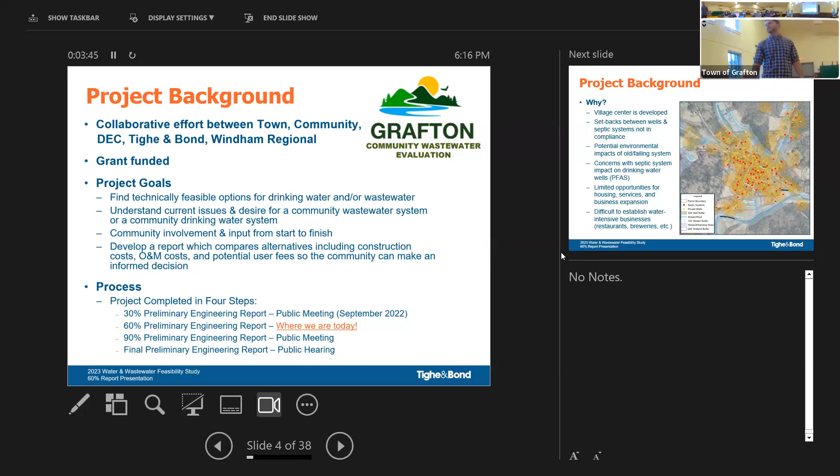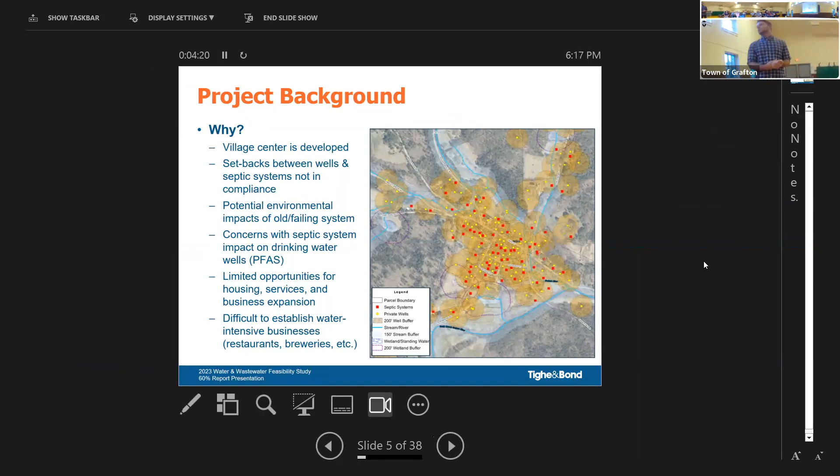So why would Grafton want to go ahead and do one of these feasibility studies and look into potential water wastewater system? A few reasons. Number one, the village center is developed. We're right here in the village. There's relatively small parcels that are pretty close together. And what happens there is you got drinking water wells relatively close to leach fields. And that can become problematic, especially if they're not maintained, or old systems that have failed. And there's also some concerns that Aaron just mentioned with PFAS around the school as well.

We've also seen with other communities that without a public drinking water wastewater system, sometimes that limits opportunities for certain types of housing, businesses expanding. For example, if you want to add a bedroom on top of a storefront, something like that. Sometimes you can be limited by the size of your parcel and septic system. It's also difficult to establish water-intensive businesses like restaurants and breweries. The lack of a public sewer system can be limiting there as well.

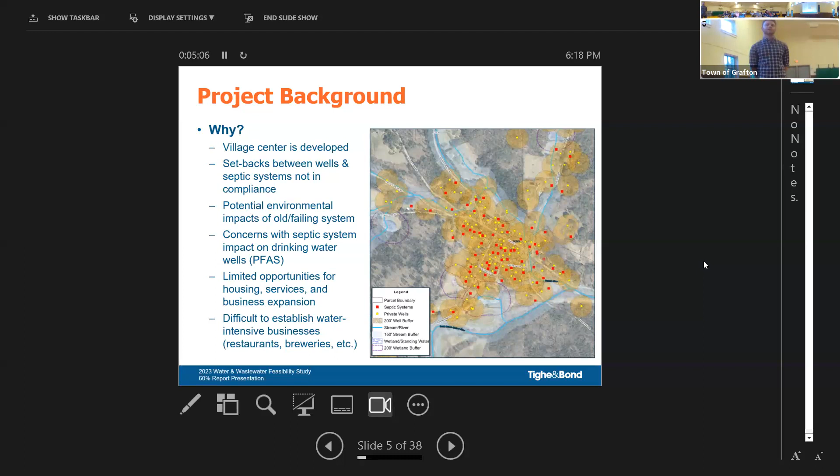So then why now? One of the big things is fundability. So right now we're kind of in a unique point where there's some historic amounts of funding out there, probably more than there's been since the 70s, during the Clean Water Act. And as an example, Grafton was appropriated about $4 million already for a village wastewater system through ARPA.

And like I said, there's some current concerns with water quality, mainly surrounding PFAS. And just want to make the point too that Grafton's not the only village or town considering this. All those red dots on that map there are other small communities who have no water or sewer system.

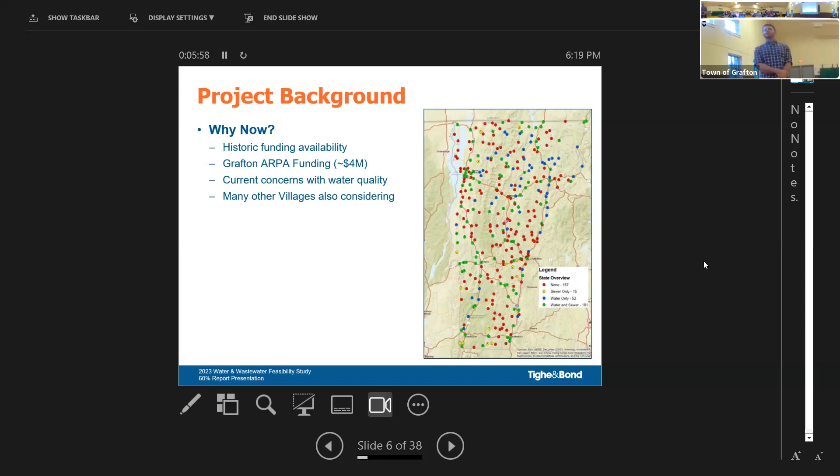So going back about a year, it's like the end of September last year, we had the 30% meeting. During that meeting, we talked about a service area. So service area is which parcels would be included in the system and be served by a public system. We came up with a flow estimate for that service area. And then we spent a lot of time talking about two sites mostly for a wastewater system.

If you recall, for those of you who were there, one was the Village Park site, and the other was the Alpine Field site, which is the field back behind the cheese factory up on the hill. We got a lot of good feedback from that 30% meeting, and the general takeaway there was that Alpine Field was generally preferred due to its size and isolation from the village. So it looked pretty promising on paper. I'll talk about some site tests we did there in a minute. And then that last part we talked about during the 30% meeting a year ago was considering a drinking water system.

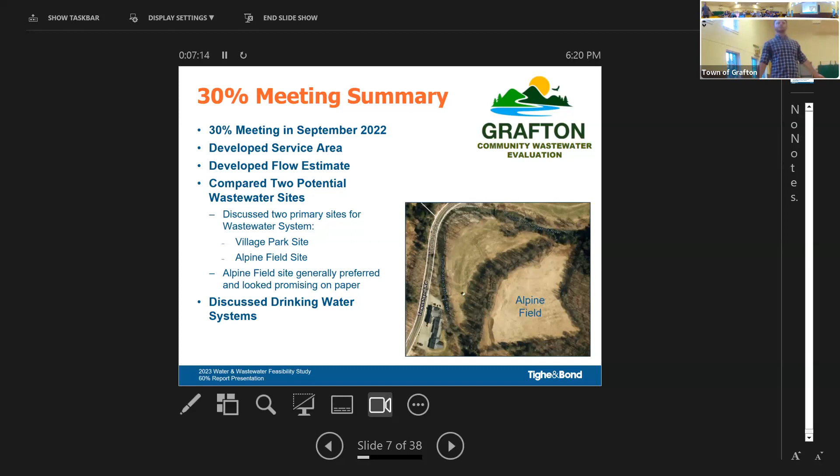So speaking of drinking water systems, as Aaron said, we've been working closely with the DEC over the last essentially year. And the drinking water system is a little bit complicated situation. So in our original scope, we had to investigate a community drinking water system. That was in our scope because it was a hot topic in the town at that time and a concern because of the PFAS.

So Aaron touched on this a little bit, but just for those of you who don't know, PFAS is essentially a man-made chemical that has been used in all sorts of consumer products for many, many years, I think back to the 40s. And it's been found in a few wells around the school. And one thing to note is that PFAS persists in the environment for a long time. It's important to remember here in a second when I talk about how it relates to a wastewater system.

So some specific considerations for Grafton related to a drinking water system. We could consider just a standalone public drinking water supply system and no wastewater system. So that's an option that we wanted to look into. And then we started looking into the Village Park site and what it would take if it was feasible to use that site for a wastewater system.

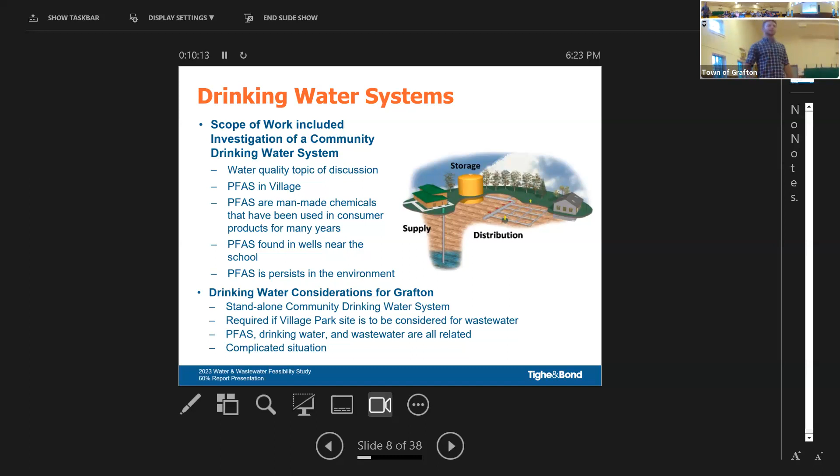So one of the things that became clear in discussions with the DEC when talking about a drinking water supply system is that the town, in order to permit a new community drinking water system, would need to demonstrate what's called technical, managerial, and financial capacity. We use TMF for short. Essentially what that means is that the town needs to have enough personnel and proper finance to successfully operate and maintain the drinking water system.

So that would be a challenge for Grafton, and Grafton's not alone in that. Any small village or community struggles with that as compared to a city, for example, where they've got a lot more resources. So that's one major challenge that we've run into here with the drinking water system.

So, path forward. The DEC has determined that a separate drinking water system preliminary engineering report would be the right next step to consider a public drinking water system, which would also need to be considered if we wanted to consider the Village Park site. And that drinking water PER would be fundable through a grant through ARPA. It's essentially the PER that we're doing now, but the one we're doing now has been a little bit more specific to wastewater. So we'd essentially redo this project with a specific look at multiple options for drinking water.

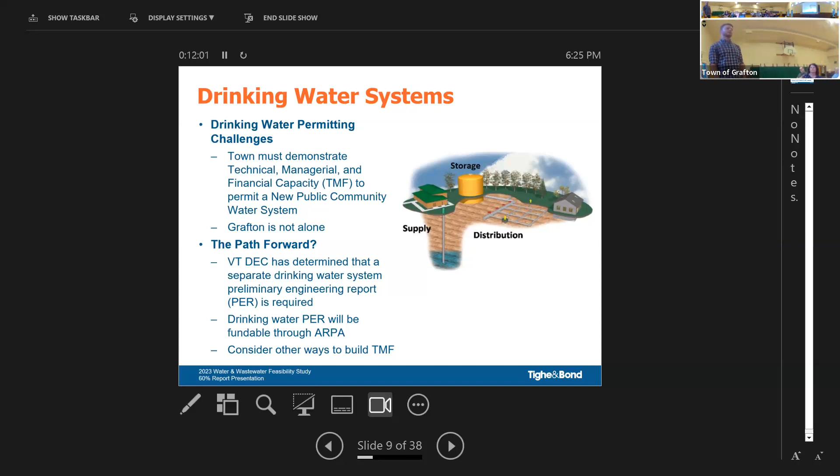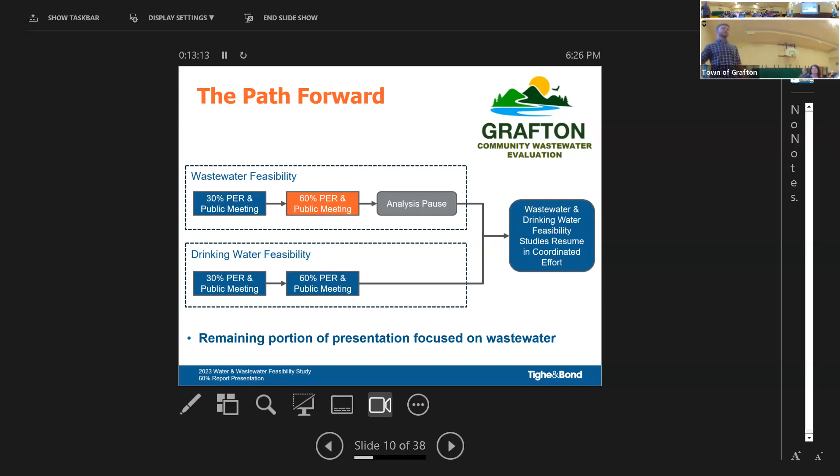So, that's a lot. There's probably a lot of questions on that. I think what we'll do now is I just want to focus on the wastewater system for the rest of the report, the feasible alternative that we have in there right now, specific to wastewater, and then we can get back to some questions on the drinking water.

So like I said, first step for wastewater is to determine a service area. So we did that. It was focused around the village center and what's called the village center planning buffer, which is about a quarter-mile radius around the village. So just some quick stats. In that service area, the area highlighted in black, there's 84 parcels total, about 56 residential, 23 commercial, 5 vacant. And then we came up with a flow estimate for that service area, about 42,500 gallons per day. And that included a 10% expansion for future growth within the district.

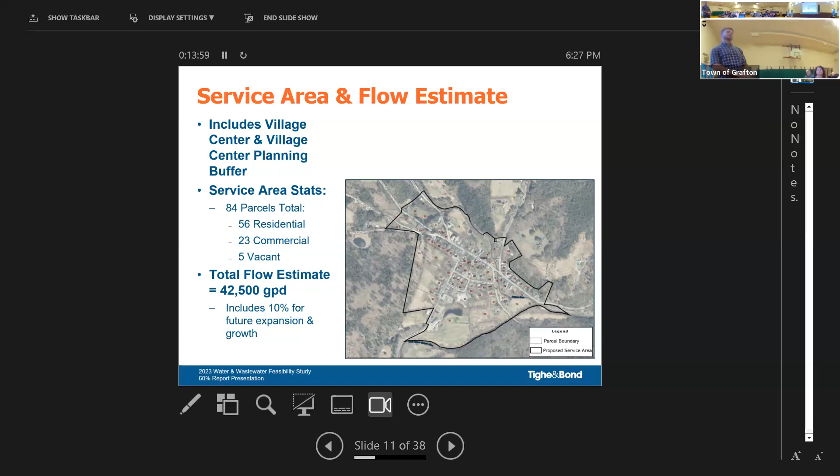So back to Alpine Fields. After we had that meeting back in September of last year, the town and ourselves went out to Alpine Field and did some test pits in November. Unfortunately, we didn't find exactly what we were looking for. We ended up finding signs of high seasonal groundwater, which becomes a challenge with installing a septic system there.

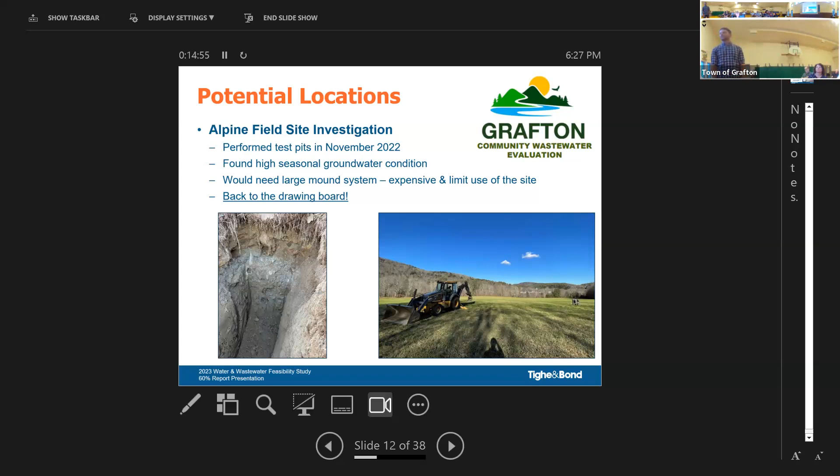Not that it couldn't be done, but what you'd have to do is essentially create a large mound system where you bring in some fill, which gets pretty expensive. But even more importantly, in this case, it would also limit Windham Foundation's use of that site, because they currently use that for spreading the whey from the cheese factory. So we had to go back to the drawing board a bit here for finding another site.

So what have we done since those test pits back in November? To be honest, it's been quite a challenge to find a good site here within a reasonable distance of the village. But we've been working with the town to really try to take a thorough pass of all areas that could be considered. One of the first things we did, it's called a cluster analysis.

Essentially, instead of trying to find one large site that would work for the whole village, we try to see if there's maybe 3 or 4 smaller areas that we could use. Unfortunately, that really didn't turn out too many good locations because of all the setback requirements from wells and the flood zone and things like that.

We also considered forested sites for what's called a spray field system. What we ran into there was that there's a lot of recreation in some of the forested areas around the village, so we didn't really find a great forested site. So then we said, okay, we really got to increase our radius that we're looking outside of the town.

And so we worked with the town, ended up identifying 14 sites, reached out to property owners. We talked to people familiar with those properties and kind of narrowed those 14 down to 2. One being the Spring Hill Farm site up on Houghtonville Road. The Upper Howland Mill site, Windham Foundation property, to the east of the village on 121. And again, we're still thinking about the Village Park. However, we can't use that site unless we have a drinking water system.

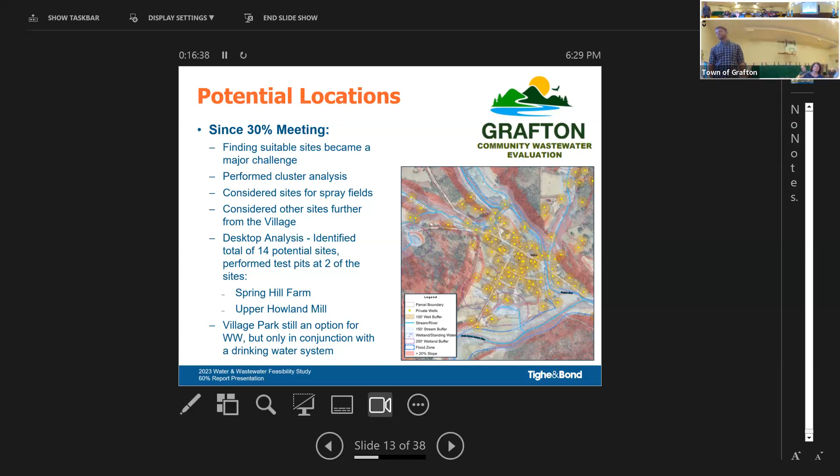So this is just a map showing some of the areas that we considered. Ultimately narrowed those down to those 3 shown in red. So just kind of a summary of what we found at each of those sites. Village Park site, decent soils below what we call a confining layer. However, like I said, there's a lot of challenges with that site.

The Upper Howland Mill site ran into high groundwater again, this time only 12 to 14 inches below grade, so not ideal. And based on those soils, again, it had to be a really large mound system, and ultimately there's just not enough area with acceptable slopes on that site, so that ended up being too small.

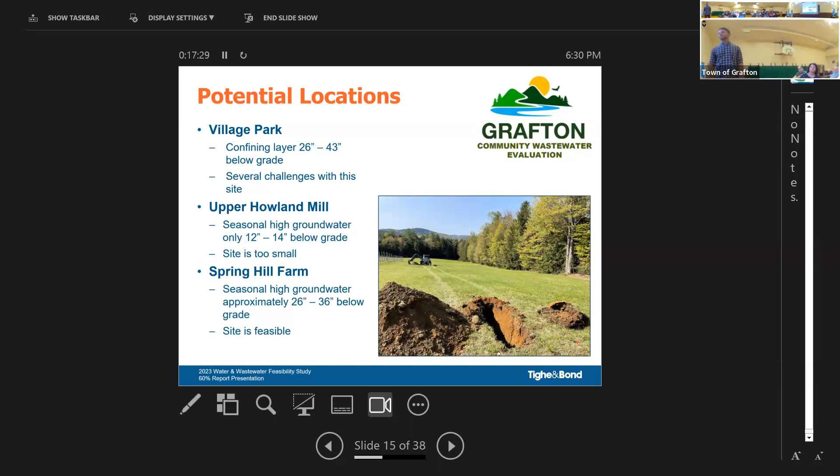The Spring Hill Farm site, however, we did run into some signs of seasonal high groundwater, but much better, a little deeper, which is a good thing. And that site's pretty large and would be feasible. So now we have a feasible site. We started looking at what type of wastewater systems could we go for.

We focused here on decentralized soil-based systems, so we're not talking about a conventional wastewater treatment plant with open tanks that are kind of notorious for being odorous. We're talking about a subsurface system that's mostly below grade.

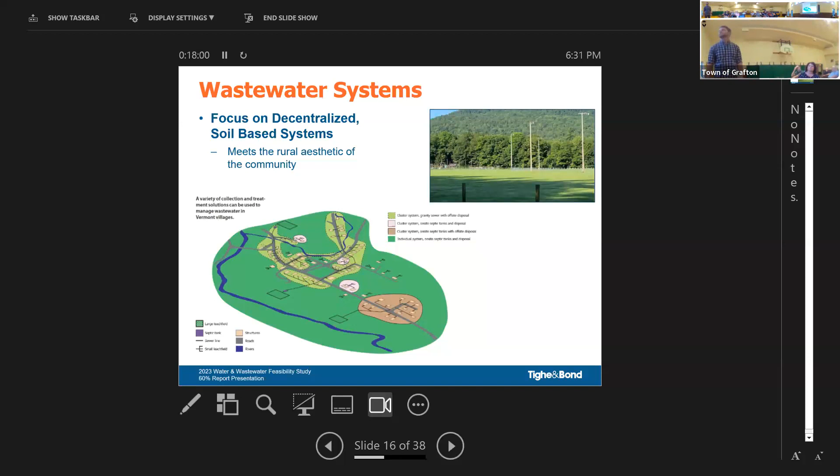So 3 components of a wastewater system: collection system, getting all the wastewater from the houses to a treatment system. And there's the treatment system. You also see us refer to it as a water resource recovery system. And then there's the return system. So after it's treated, back into the ground.

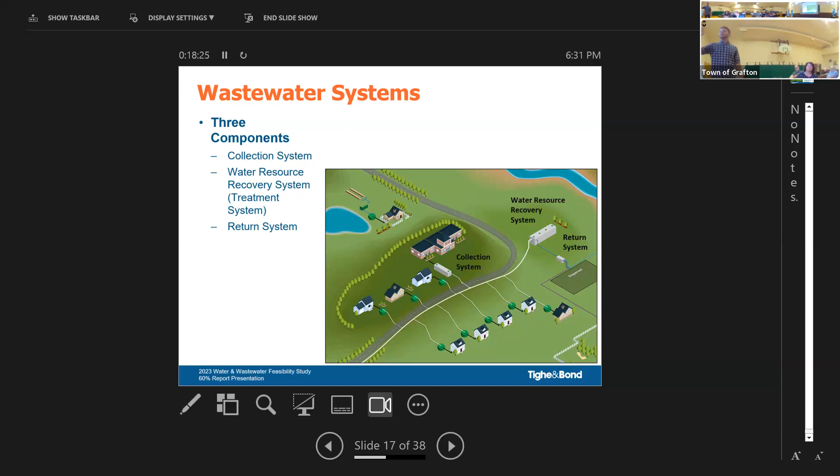So I'm just going to briefly talk about all the different technologies we looked at for each of those 3 components. So starting with the collection system, there's generally 2 types: conventional and septic tank effluent. Conventional is a lot of times used for some of those larger communities. Think about sewer systems and manholes in a city, where the solids and the wastewater are transported right from the house, right out of pipe, and right into the collection system, which is pretty big diameter piping.

And then there's septic tank effluent collection systems, a little different. This is a lot of times used for smaller communities like Grafton, and the concept here is you still would have a septic tank at each house, and there'd be what's called an effluent filter on that septic tank. So the solids all stay in the septic tank, and then just the liquid wastewater goes out to the treatment system.

There's a couple benefits there. Number one, because you're not transferring solids, you could use smaller diameter piping, and then you can install that piping with what's called horizontal directional drilling. So you don't have to do as much open excavation to install it.

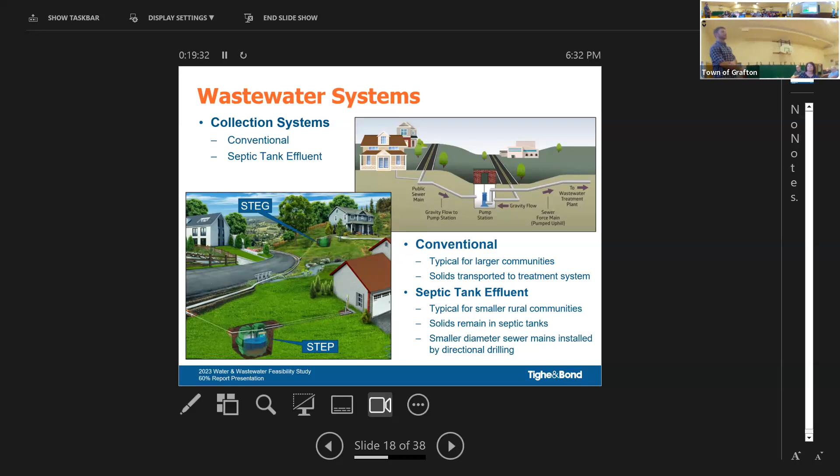Then we looked at 3 treatment systems. We were only considering technologies that are approved in the indirect discharge program. So the ones we looked at are recirculating sand filters, a media filter, and then a fixed bed bioreactor.

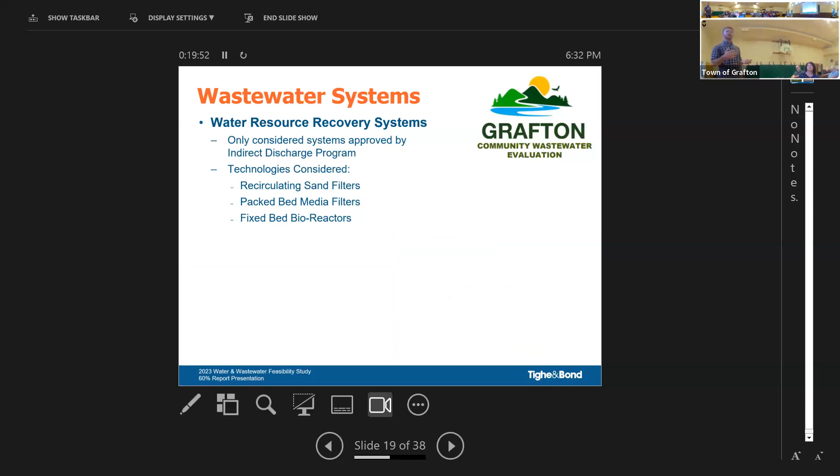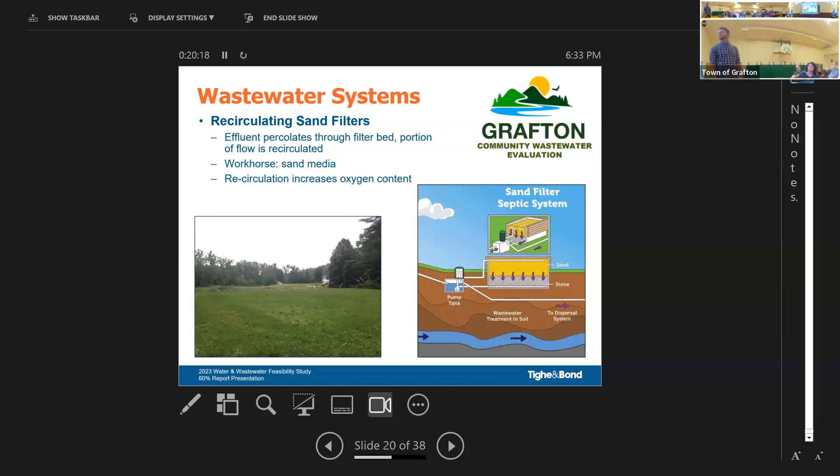So the first one, sand filter, really simple. The wastewater is distributed over a bed of sand, percolates through. That sand essentially treats the wastewater, comes out cleaner. A portion of that is recirculated, and then it goes to the return system. And I just mentioned too, those would be completely buried under a field.

The next one we looked at is a media filter. These are a little different, but very similar. They're all very similar treatment concepts. These, however, come in kind of prefabricated fiberglass tanks. Essentially, inside those tanks is a whole bunch of textile media. So the wastewater gets sprayed over the media, percolates through. There's some microorganisms on that media, which treats the wastewater.

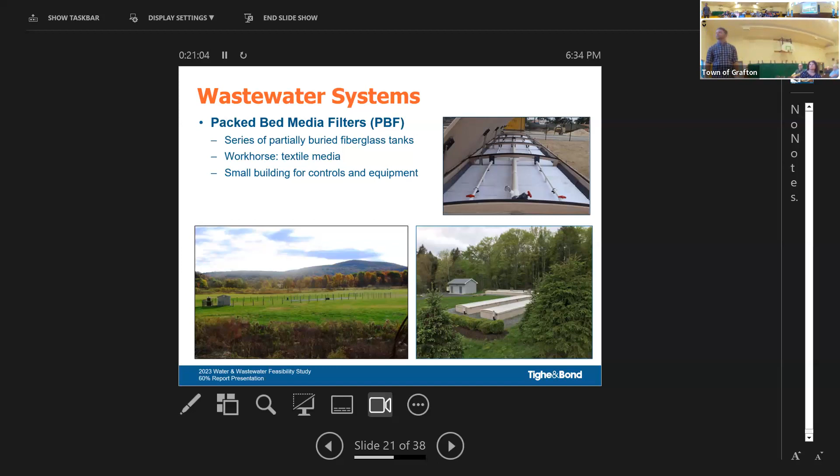Usually these, this picture down on the right is of a completed system. A lot of times those are installed a couple feet out of the ground just to provide access when there's snow. And then the final one, again, very similar, a little bit different style media. These ones are installed in a precast concrete tank. Some air is flowing.

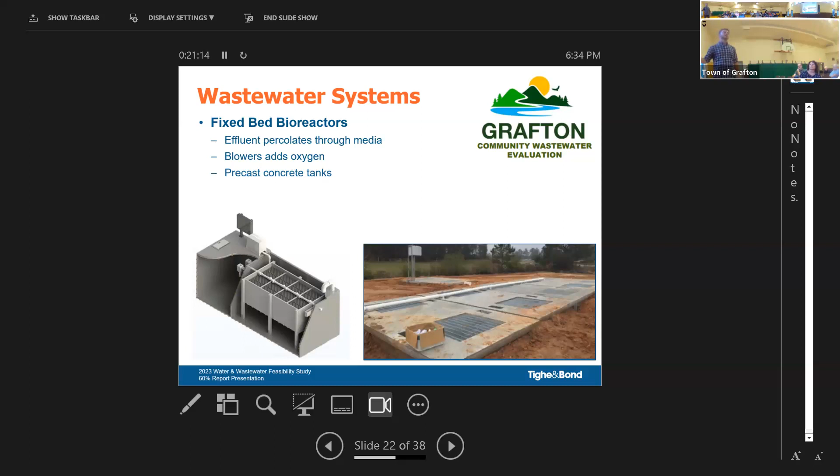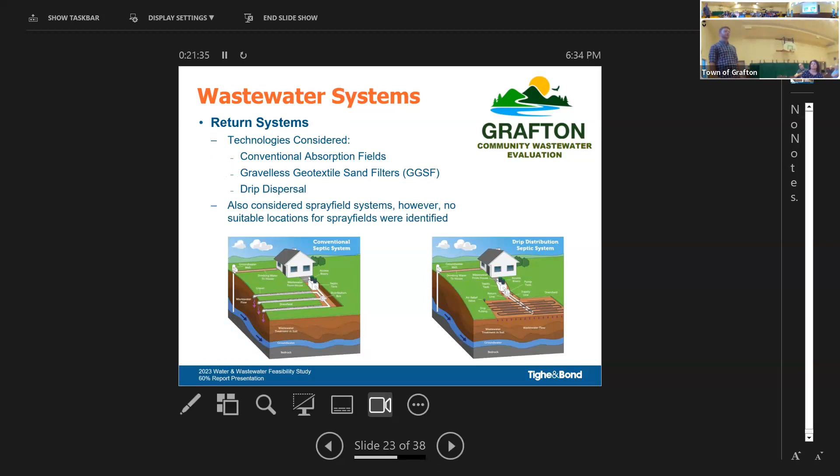And then finally, last component here, the return systems. We looked at 3 types: a conventional absorption field, gravelless geotextile sand filter, and drip dispersal systems. Like I mentioned, we also looked at spray fields, but we couldn't find a good site for those, so I'm not going to talk about it here.

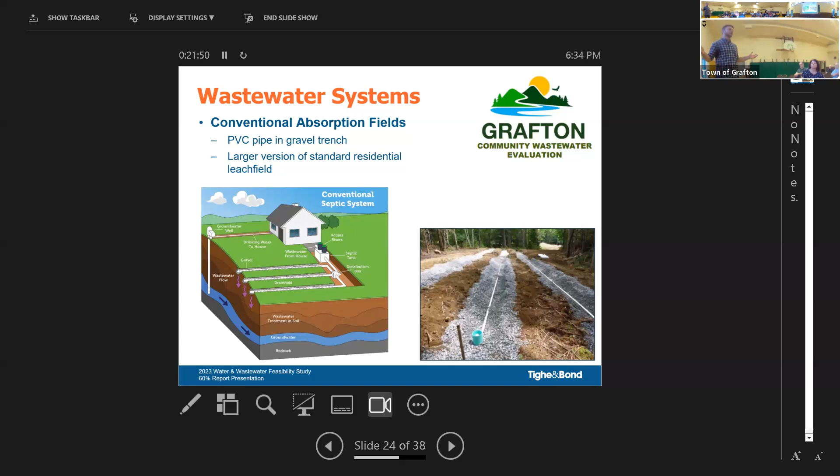So, conventional absorption field, that's what probably most of you have in your backyard. Essentially, a perforated pipe in a gravel trench, except this would be much larger for the whole. Gravelless geotextile sand filters. These are considered an innovative and alternative wastewater technology in Vermont. These systems have a lot of unique advantages for specific sites.

Essentially what it is, a little bit more complicated. It's another bigger diameter perforated pipe wrapped in some sort of aggregate, wrapped in a geotextile media, and then put in a bed of sand. It does have some advantages at certain sites because you can essentially have less trench length.

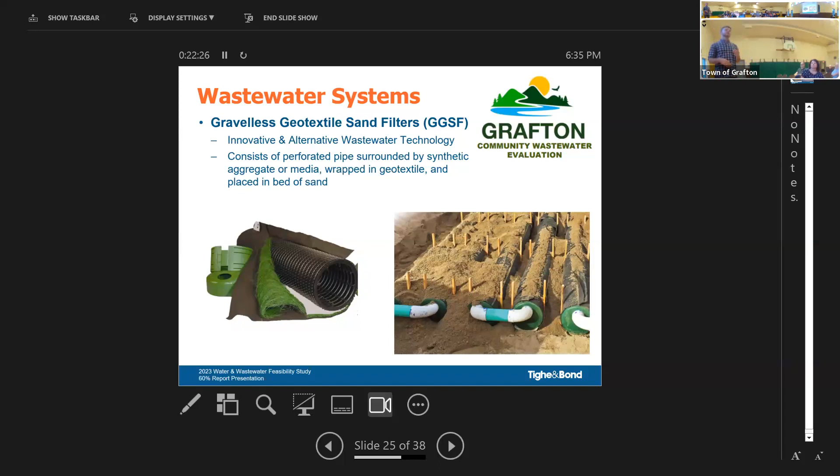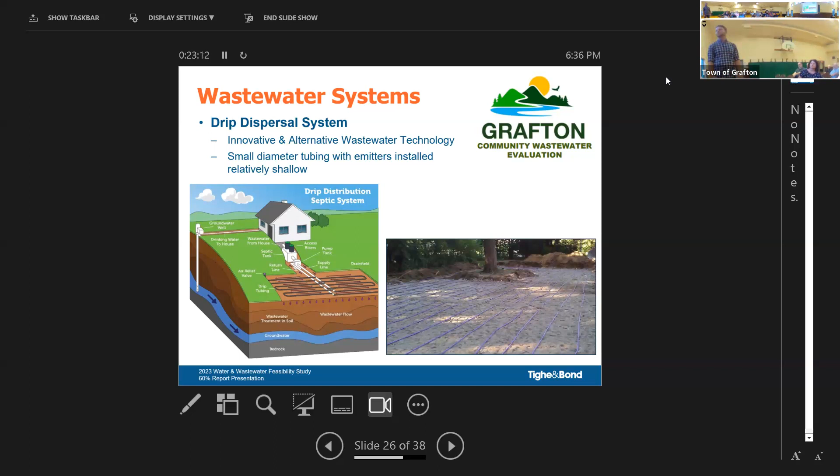These ones have a lot of advantages, pretty inexpensive to install, and you can also install them pretty shallow. So it's really beneficial for sites like some of these sites here where there's high groundwater. So we took all those different components of the wastewater system, tried to come up with a few alternatives to dive into in more detail and compare the costs.

So the first one is a wastewater system at the Spring Hill farm site. The second one would be a wastewater system at the Village Park site. But like I said, that would require a drinking water system, so we're not going to talk about that one tonight. Number 3 is just a drinking water system, but again, those require that drinking water PER. And then the fourth one, always an option, is do nothing, which is pretty self-explanatory.

So just to kind of provide a little bit more detail on alternative number 1, the wastewater system at the Spring Hill farm site, try to give you guys a little bit of sense of what that would look like. So what we propose for this alternative is called septic tank effluent pump system. So there'd be septic tanks at each parcel still with a pump in it and a filter that would send the wastewater up to the Spring Hill farm site.

Couldn't do gravity for that location because the Spring Hill farm site is uphill compared to the village. And then at that site would be the treatment system, in this case, a recirculating sand filter, and then a drip dispersal system underneath the field.

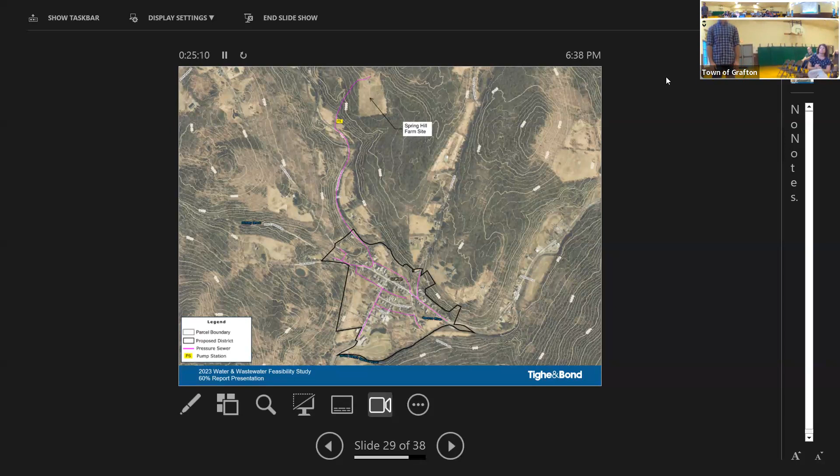So the question that everybody usually likes to know is what's the cost for the system? So looking at the capital cost, we do what's called a class 4 cost estimate. So we came up with a cost estimate for the collection system, the treatment system, the dispersal system, and all of that together for this alternative at the Spring Hill farm site. In today's dollars, around $8 million.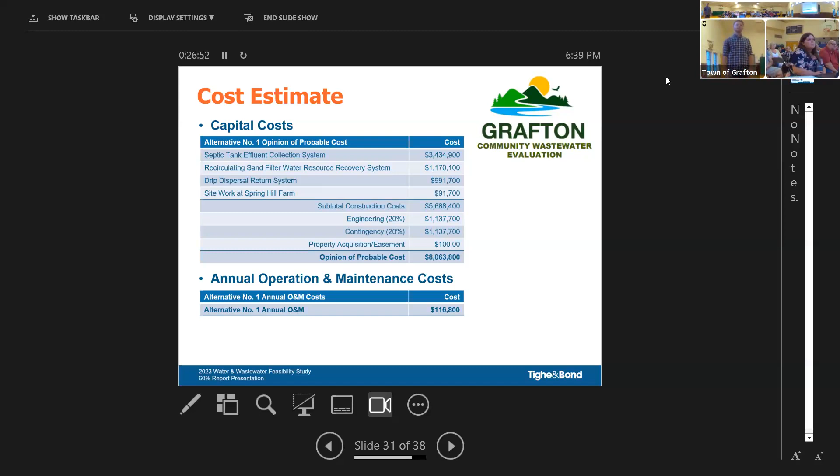And we also come up with an estimate for the annual operation and maintenance costs. So that number would include part-time labor to maintain and operate the system. It would include pumping out all the septic tanks in the collection system at each parcel. So that would happen on a reoccurring schedule. And then things like equipment replacements, electrical, contingency, administrative costs, all that's wrapped into that approximately $116,000 a year.

So when we're coming up with user fees, we try to compare them to what's called the EPA sewer affordability rate. So the EPA states that an affordable user rate for a single family household, which we call 1 ERU, which stands for equivalent residential unit, needs to be less than 2% of the median household income in order to be considered affordable under their criteria. So the median household income for Grafton is about $68,000. So 2% of that is about $1,363. So to be considered affordable for Grafton, according to the EPA, you need to be under that number.

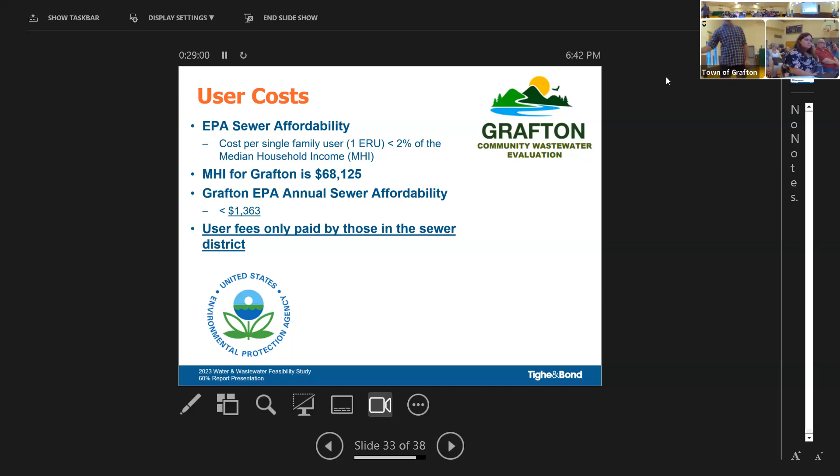So the question becomes, how do we get to an affordable user fee? And cutting to the chase, essentially the entire project cost would need to be covered under a grant instead of a loan that would have to be repaid at an interest rate. So if, for example, we got grant funding for 100% of those project costs, in that case, the users would only be responsible for the annual O&M costs, essentially. So that spread across the total number of ERUs in the proposed district is about $1,200 a year per ERU. So about $100 a month.